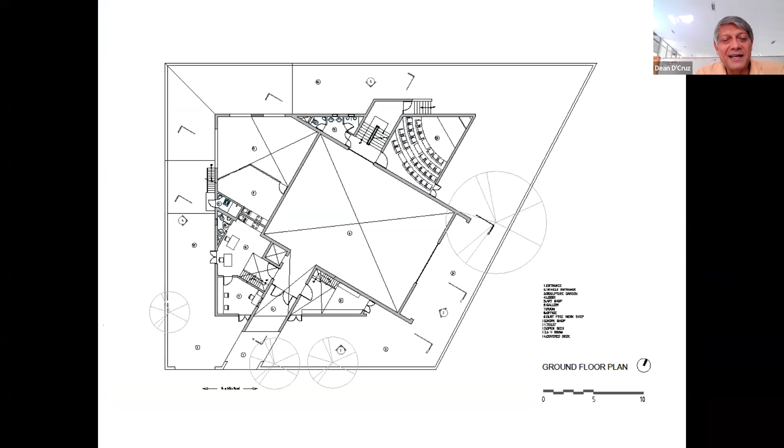The first thing when offering a solution in architecture is to really think out of the box. This is the box we designed—it's actually a museum, called Museum of Goa, which houses contemporary artworks. It's in an industrial estate, a high footprint squarish plot, and we decided to break the box and create something interesting in a fairly standard industrial layout.

One enters the building askew, moving into the various spaces from right on top, skylit, and carved inside the box, creating double height spaces linking all these spaces together and connecting them visually—essential in a gallery, where you can read the way you move through the space and also short circuit it however you want.

A lot of our work is drawn from the past, from tradition, but adds a contemporary twist. This is the cathedral we designed in Karwar, just south of Goa. A cathedral, as you know, is a mother church, so it's an enormous building that can accommodate up to 1,000 people.

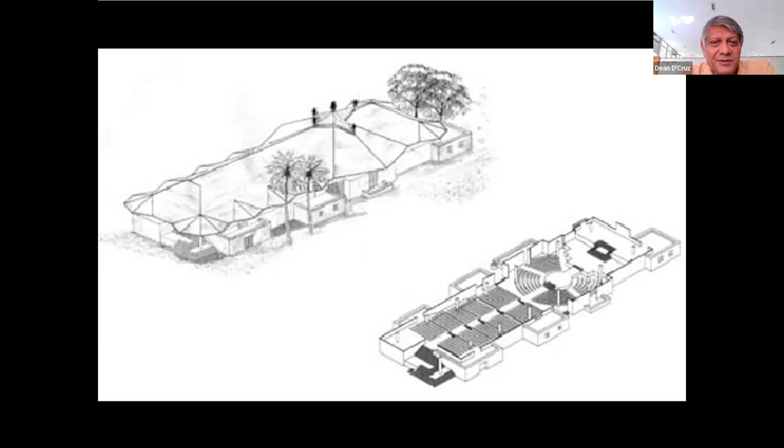It's in an area where Mangalore tiles, clay tiles, are used as roofing systems, and there's granite stone used traditionally—in fact Karwar is an export zone for granite stone. The building is very unlike a traditional cathedral, yet it draws its essence from tradition in a very contemporary manner.

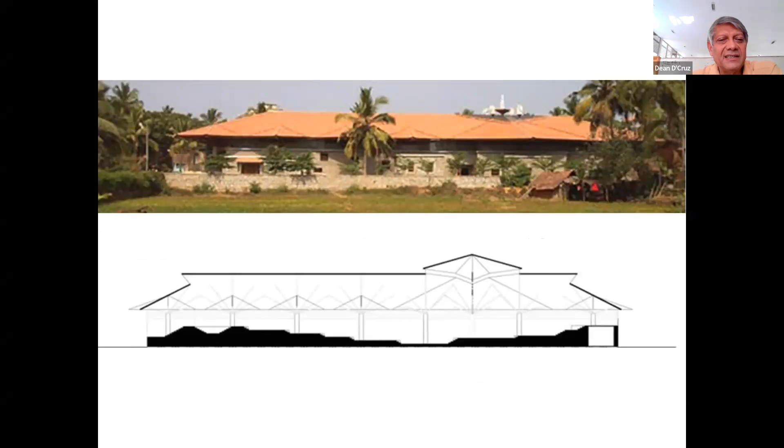It's actually a very linear building, like a giant amphitheater. It has a roofing system that floats above the whole building, resting on internal columns, not on the edge walls—very much like a tree, almost protecting the followers who visit the church.

A lot of it is in granite, with skylit areas all around and in the center as well to highlight the altar. That's the structural system we have.

We've designed about 300 houses across Goa and India, and everywhere we design, we ask: what is the spirit of the space? This one is right on the waterfront—we said let's make it feel like a ship's deck, so the house sits on the waterfront and opens out to the sea, very much like the side of a ship.

This building is set into an old stone quarry, and we followed that—the sloping roof gently rises from south to north, following the old quarry line, stepping up in the space. The whole roof is designed to have solar panels, making it completely solar ready. It's so important today, when looking at alternative energies, that we keep our buildings ready for them—a south-facing roof is the most efficient way.

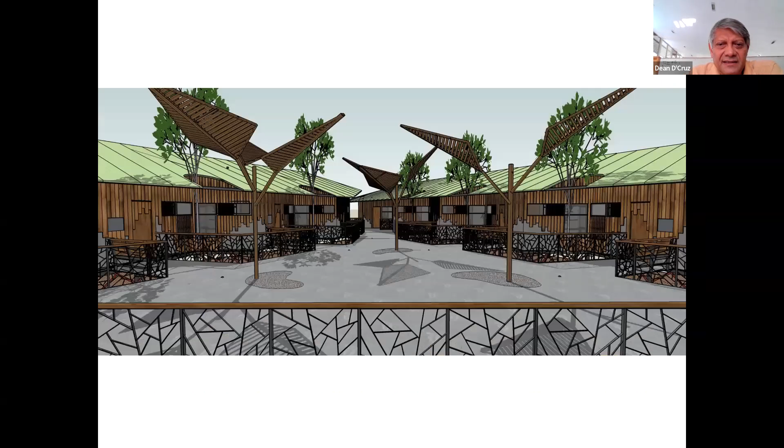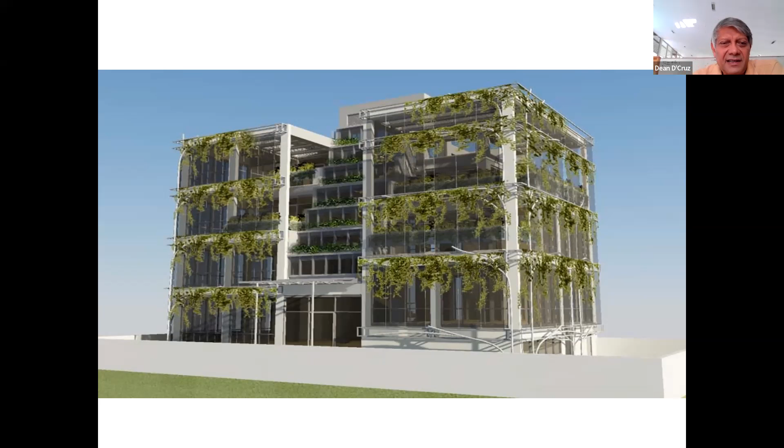It's steel, of course—it's a completely prefab building. It's a hollow column, hollow beam system, but all the services actually run through the core of the building. So even your air conditioning, your plumbing, your power lines, communication lines run through it. The whole idea is that it's a building which doesn't have services mounted on it, but integrated into it. And it's completely dismantleable, built in steel, so with steel prices going up, you can probably sell it for more than it cost you to build it when you want to demolish it.

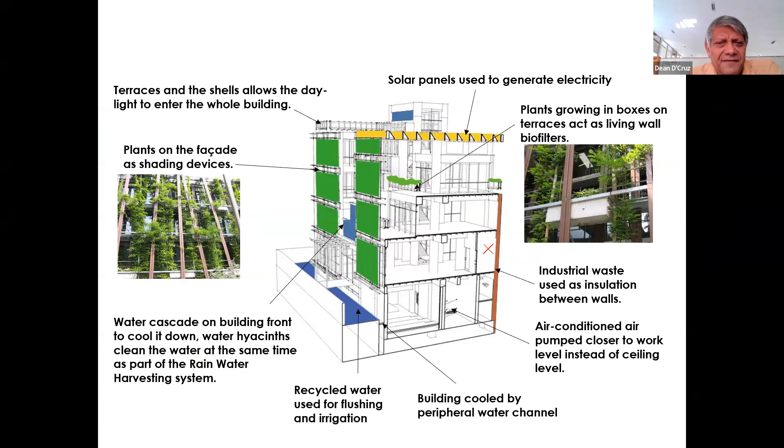The floors, of course, are just stone slabs sitting on neoprene pads. And those are all the little features that we've added to it.

This is a school in Bijapur. It's not yet built, but again, Bijapur is a hot and dry climate. We decided that we create these wind towers, actually capture air at a high level, and hydrate it.

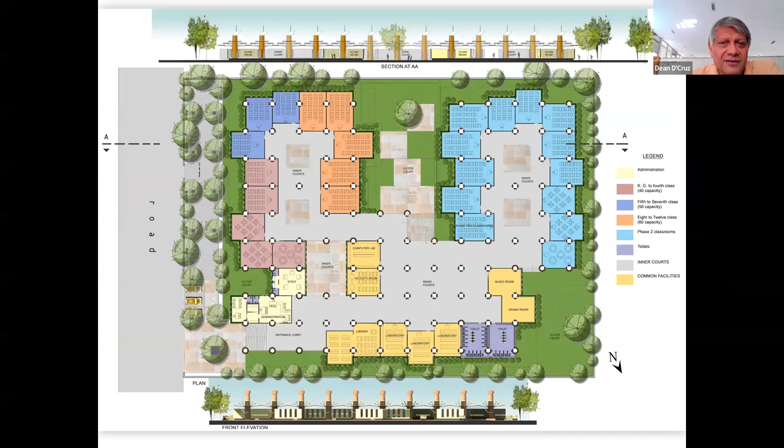The layout is just like a series of columns, and all the walling systems are actually flexible, so you can change the layouts of the classrooms and laboratories. That's the main concept of the cooling system, which takes in air at a high level, hydrates it, brings it down, and cools the space.

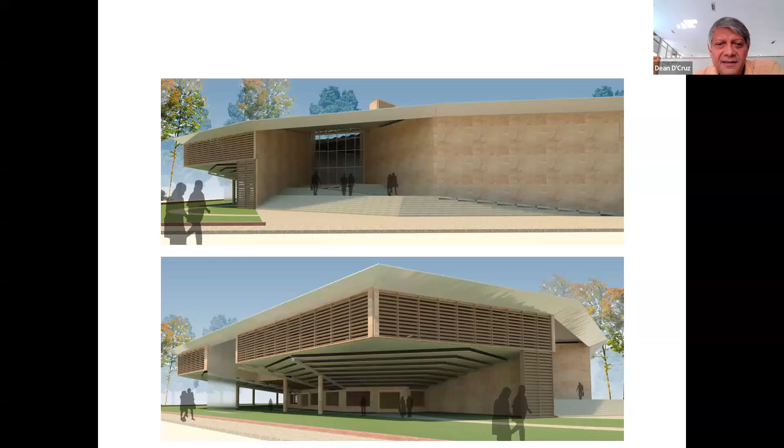For the same group, this is the library building. We have a cafe below, and the auditorium and classrooms above, and that's how the auditorium and classrooms are lit and ventilated with top lighting and bottom ventilation systems. That's how it moves through the space.

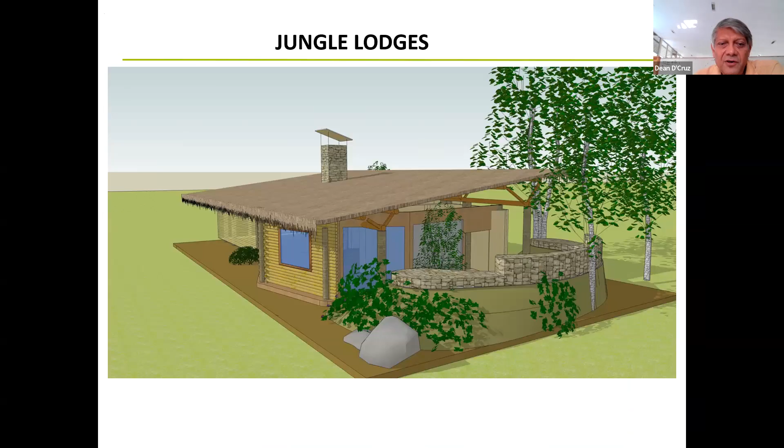In the lodges also, it's all about a response to where you are. So in the lodges, for example, a lot of them are built in areas which get very hot and very cold. Therefore, during winters, we have to have a natural warming system, using thermal blankets over water bodies and absorbing thermal mass.

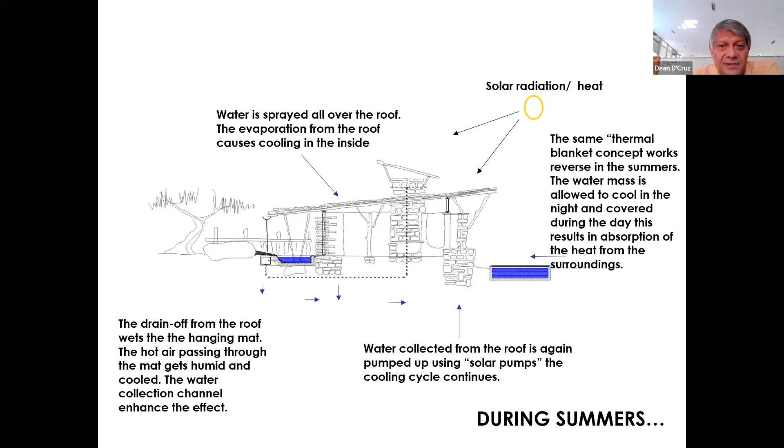And in summers, of course, how do you cool the building? So all these are responsible ways of actually responding to varying climates. This is another lodge in Bhuj, where again we're looking at how to integrate technologies into the lodge in terms of alternative energy systems, natural cooling systems, and appropriate materials.

The only way we can do this—and it's very difficult these days—is actually convincing a client to go green, because a lot of them think it's much more expensive. And the only way to do it is to actually walk the talk yourself.

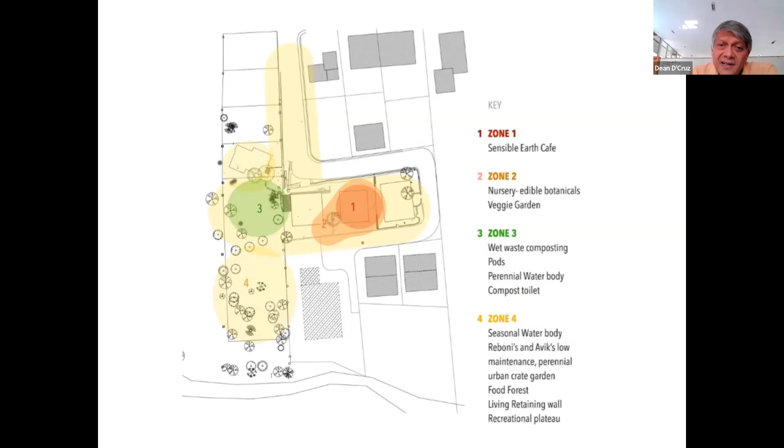So in our own complex of buildings, which has 3 buildings and a piece of land on the side, we decided to actually demonstrate it. Those are the 3 buildings: architecture on one side, product line on the other side, and our design center, where we have outreach programs on the issue of design and the environment.

So I'll leave it with that, and I'll let Sanjay continue, and leave a little time for all of us to have a question and answer session. And that's our buildings in the forest, at the edge of the forest. Thank you.

Thank you, Dean, sir, for presenting your unique projects and the concept behind them. I personally have visited the Museum of Goa by Mr. Subodh—really good design, sir, good design.

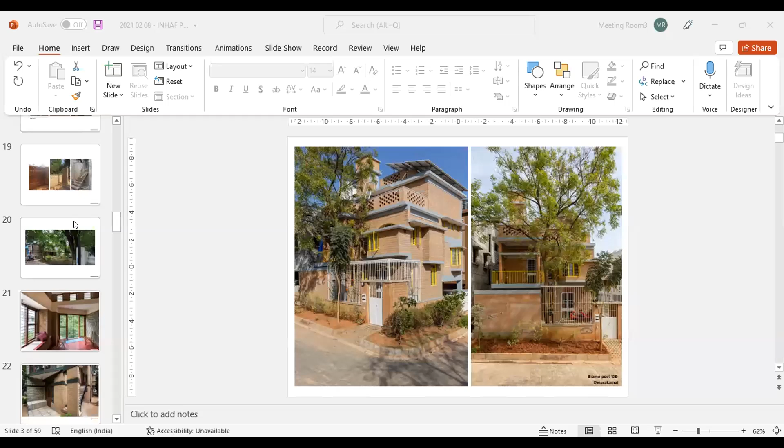Share here. Let it go. Yeah. So we have to slideshow.

So we at BIOME have been around for 30 years and we have practiced at different scales. One of the scales we have practiced a lot is the small house, for, I must say, the very interesting clientele of Bangalore who want to really make a house of their own, and if possible, it has to be ecological.

So we build with earth a lot, because the best earth available in India to build is in Bangalore. So why not use the city for the resource it can give? Most of the earth is usually sourced from the basement or the water tank, or if there is a larger project happening. So this is a house on a 30 feet by 40 feet plot.

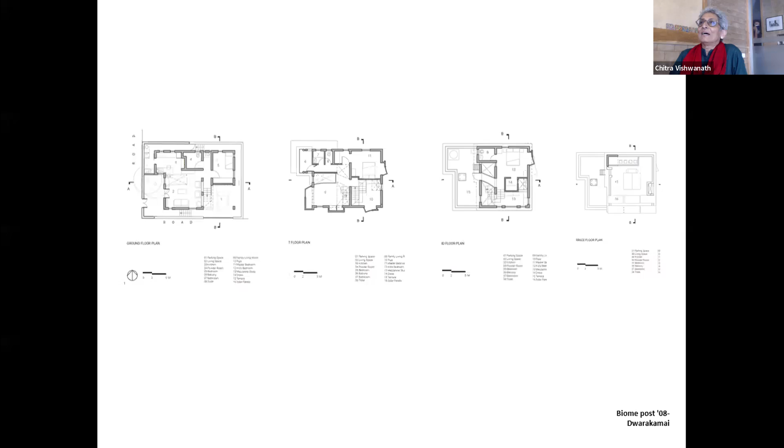And you can see that everything is there. You can see the large solar panels too. And it has retained the neem tree within its area. So that's the plan of it. And this is a section.

So you can see how one has to really modulate that everything comes within the space, but also have fun, and also make it aesthetically different from otherwise normal construction.

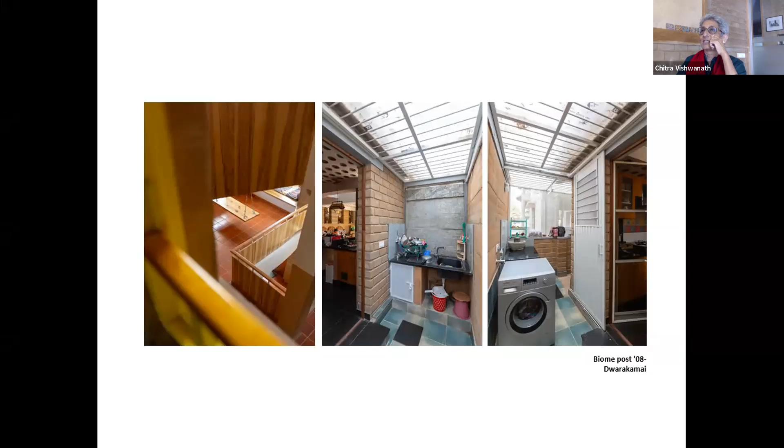But in the smallest of places, you have to get the best light and the best accommodation for everything needed in the house, from the washing machine to the dishwasher, and extra space outside to use in the kitchen. The space is inside, and that's the terrace.

So the terrace is one of our favorite elements in a house. I don't know how to stop this, but...

So the terrace is used for energy. In this case, the terrace is used for solar water heating, electricity, and also a small biogas unit. And there is the Gujarat boiler. All sorts of energies on the terrace.

We collect the good water, we call it lifeline water, for drinking and cooking purposes on the terrace, and we treat the wastewater on the terrace because that's the only place where you get the sun. The sun and terrace go synonymously, and you use it to the complete possibility.

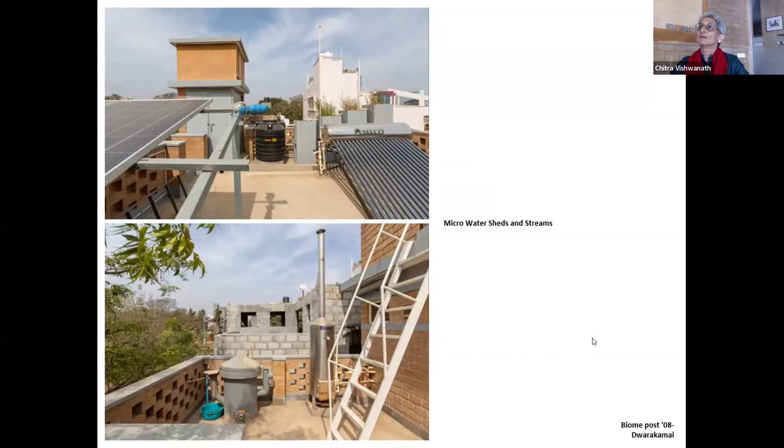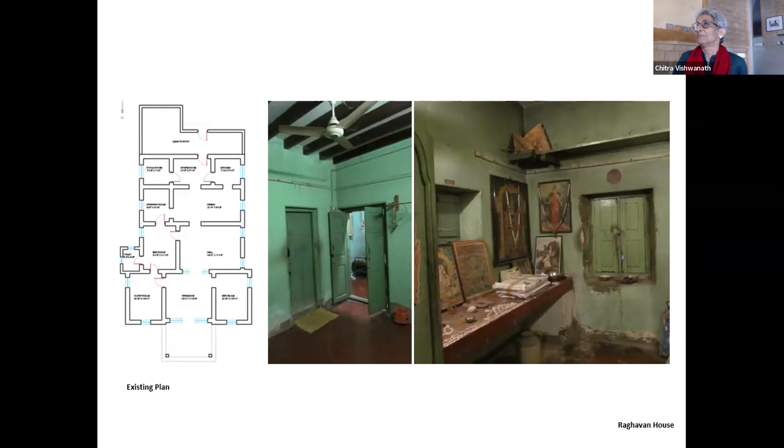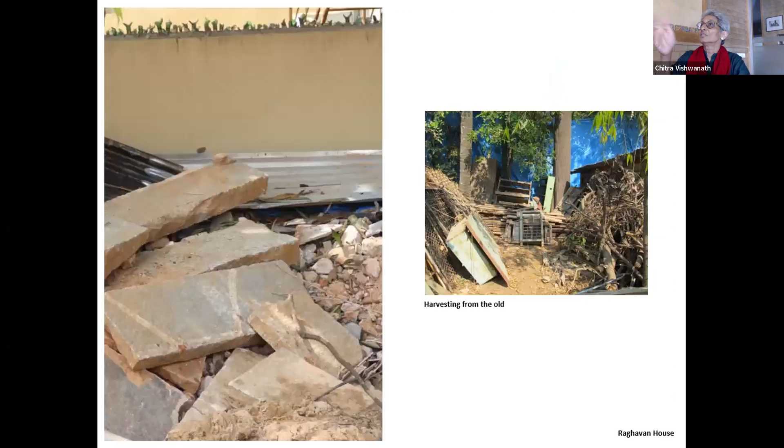So we kept all the materials we were able to get from the demolished building, kept them neatly. You can see bricks, complete bricks, and this kind of complete bricks one could get only because the mortar was mud. Broken plaster, broken concrete, the stones, the old windows.

But what really happened was that when we started digging for the foundation, we found that the soil was soft and there was water. We went back to history and found that this was also a lake bed some 100 years back. So it was filled up and turned into colonies, the way Bangalore does all the time.

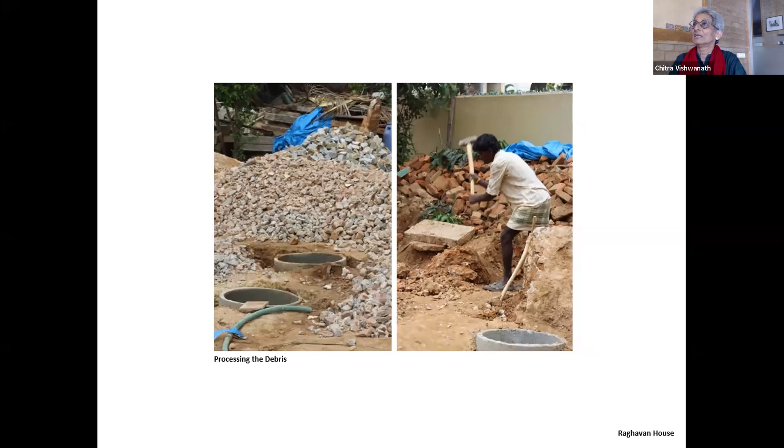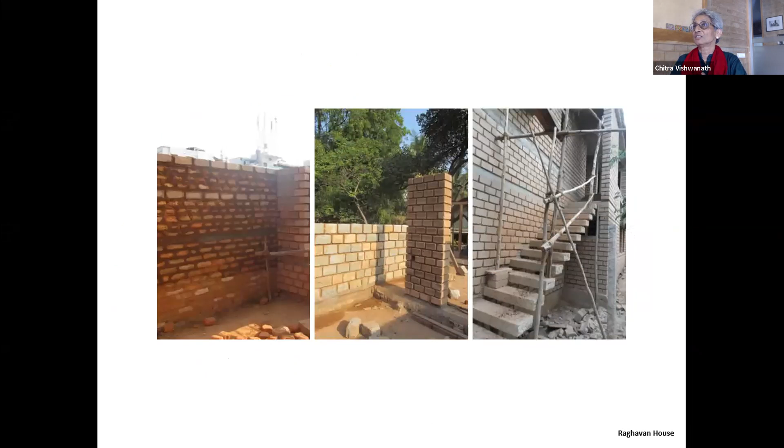So the stone which was earlier in the foundation becomes part of the house above, also saving cost. That's how the building is now. All the trees saved, inside is better lit and ventilated, and within the budget the client gave. And nothing went into the urban landfill.

So they wanted courtyards within, they get courtyards. Similarly, taking from what Dean spoke about, the steel and how you can get back the material.

This was a project for a small school in a 15,000 square foot plot, a 10,000 square foot school. We decided that we should make it in such a way that the building can be moved by its parts and repurposed or reused, rebuilt with the same material.

Luckily here, the land was available to the clients only for 5 years, so it was easy to convince them to use materials which can be reused completely. Even the foundation can be removed, because reaching up to the plinth we used what in Bangalore we get as stone slabs, so we can fill up for the interior.

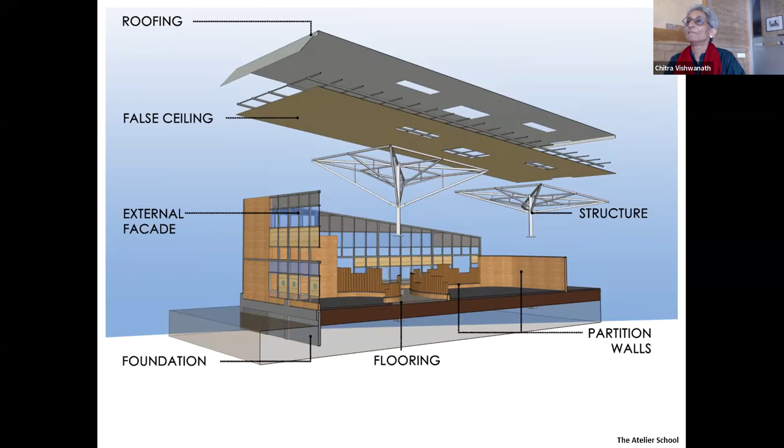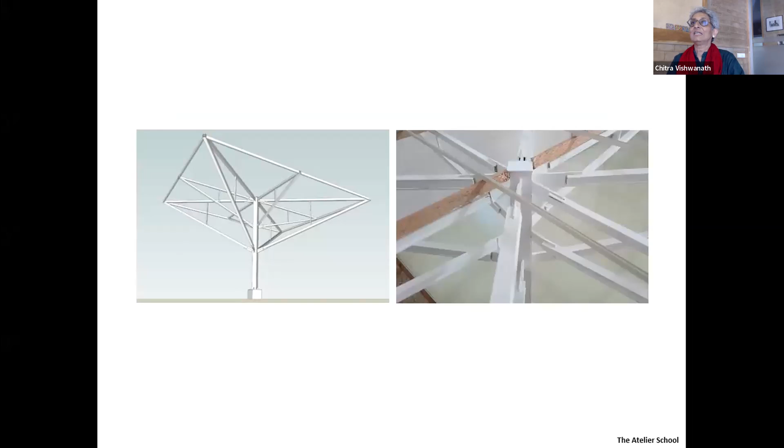The structural engineer brought two columns into one by the way he decided to span. This is the building, this is what is inside. The walls are made of paper tubes.

So if you don't remove them, they can just compost. Even the furniture for the children is made with paper so that it's much lighter. These curved walls reduce the reverberation because it's in fact largely a large shed.

The flooring is paver blocks, and the lower portion is filled with quarry dust, easily available in Bangalore. So not only do you get back the flooring, you also get back the quarry dust, which I'm sure has doubled its cost. This was about 5 years back. This is the interiors.

And this is my favorite part of the whole project, the small toilet. It's a toilet for the small occupants, and all the pipelines come to this center space, which can be opened if it gets clogged, and then they go out in a larger pipe. It's important that one also works with the services and has fun.

This center space now has a curtain, where the children, if they've soiled their dresses, the dress is changed, or they wait till a toilet is available for them. Then we made our own office on the first and second floor.

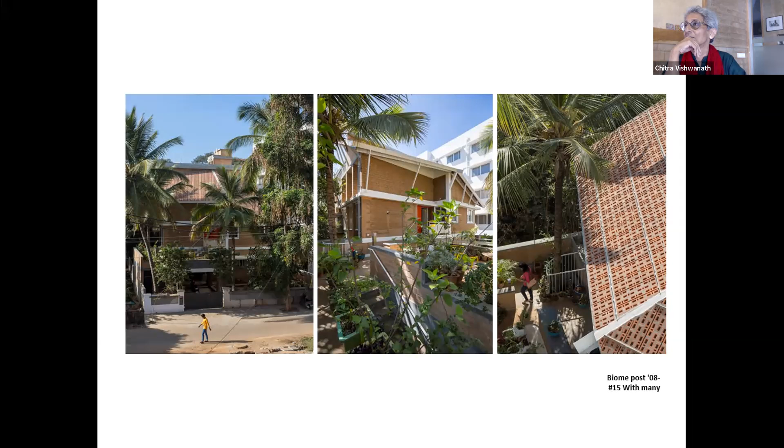Here we changed the way we put the roof. It's a GI sheet, but the top of the roof is with jali blocks, which allows water to pass through but shades the roof so it doesn't become hot inside.

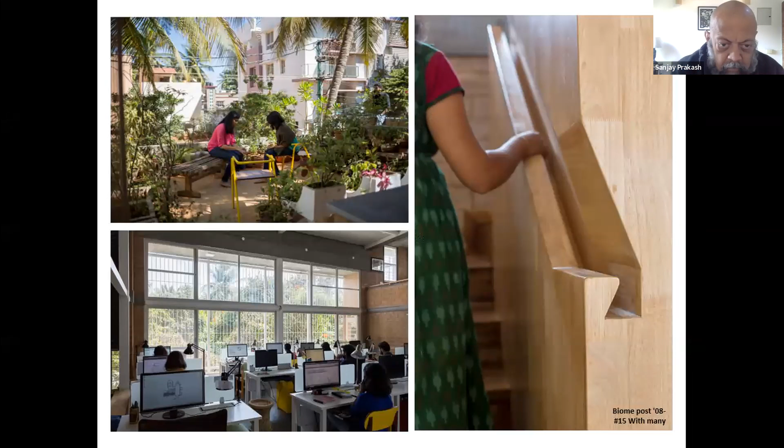That's our office. The terrace is used for discussions. The inside opens to the east with a huge amount of shading, so it's just the light needed internally.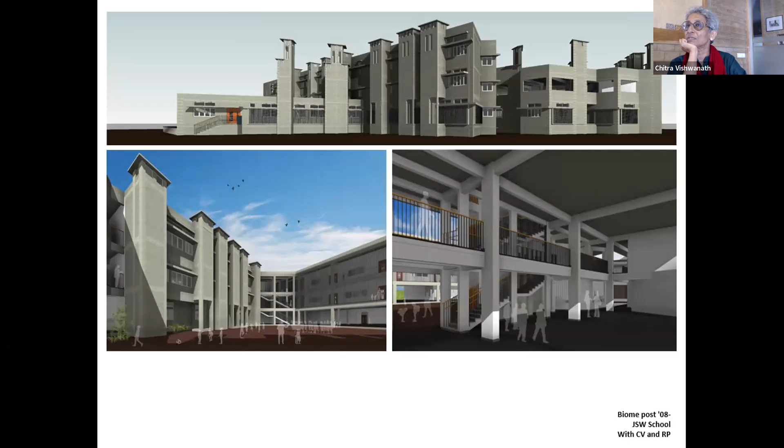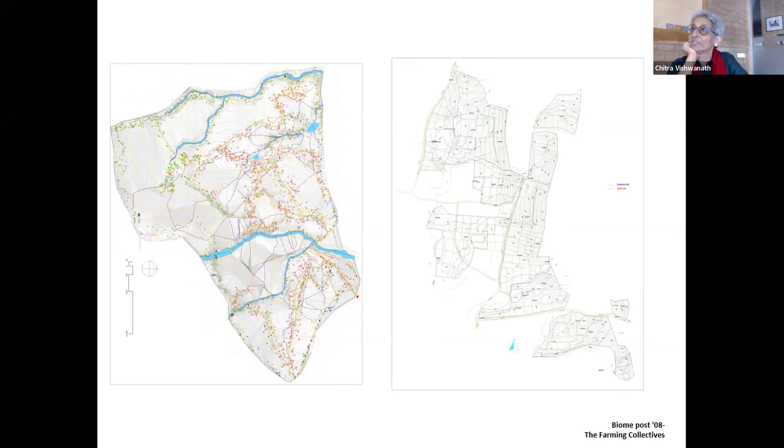Right now we are mostly busy with designing collectives. Collectives are where a developer picks up a larger piece of land and people come together and ask that the space be designed for themselves to live, but also design the whole area for energy, water, and food. So nobody owns a place, but they live collectively, and the land is decided where the construction would be happening, decided upon the kind of soil available, the soil which cannot be used for agriculture.

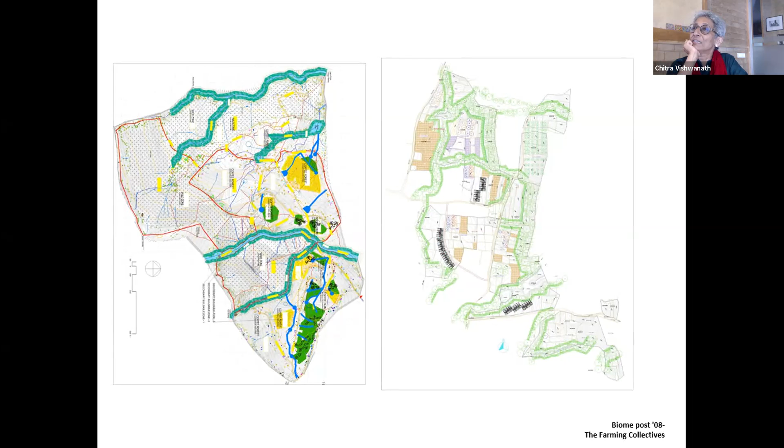So the whole land is studied, the waterways of the land are studied. We make riparian zones where no more construction would happen, and then decide where you will put the buildings. The buildings come last. Similarly in other projects, this is how the buildings come, and they become a community space rather than plotted development.

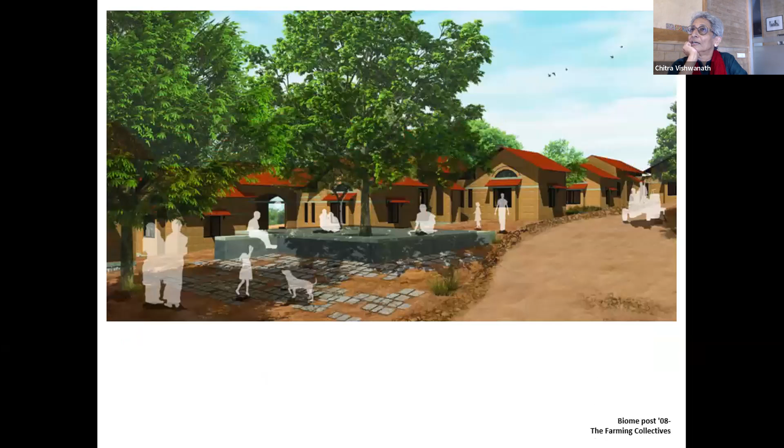And we do a lot of small homes, sometimes as small as something on a terrace. This is a 30 by 40 plot, and you do a really small addition of a bedroom and a kitchen. What gives us the most joy is how the people use the place and feel happy about it.

Here is the lady of the house doing her yoga in front of the space we've designed under the light. And that's the best award one could get. Thank you.

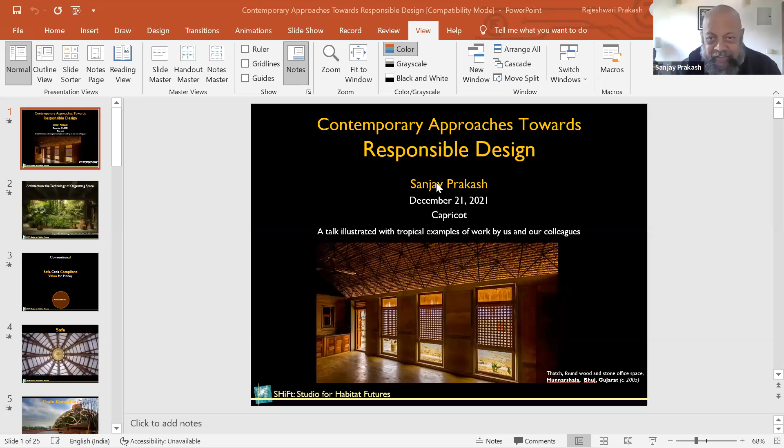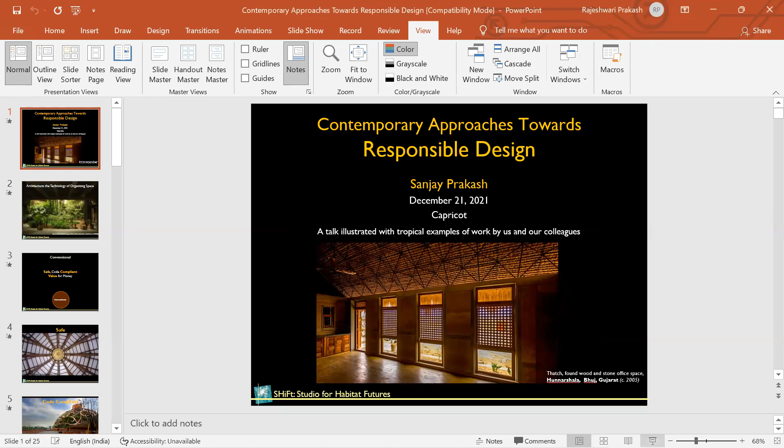Okay, there you are. So I've put together the presentation slightly differently, in the sense that I haven't gone project wise, I have gone concept wise. Here is a talk illustrated with tropical examples of work by us as well as our colleagues. This particular one is from Sandeep Virmani of Bhuj, who has put together this wonderful office made of found wood and recycled thatch.

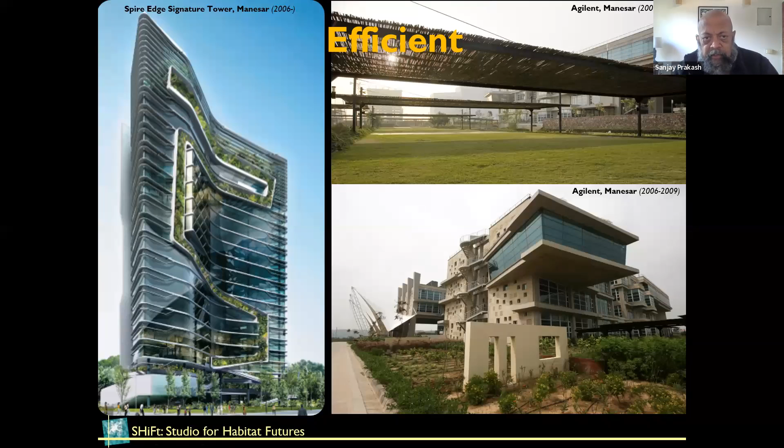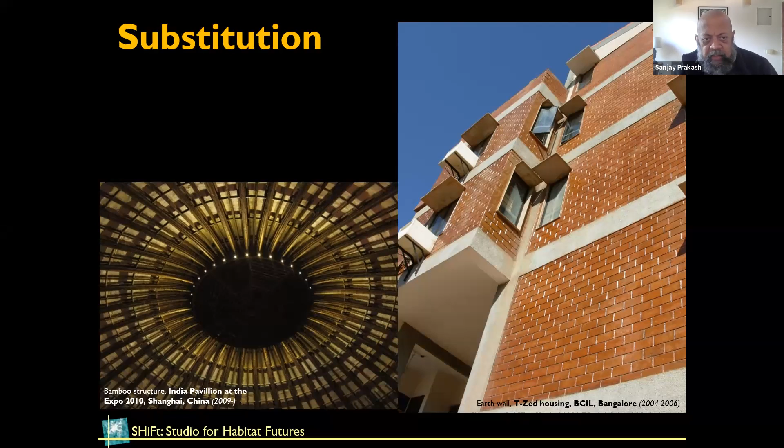Substitution here is more usual. Steel is substituted for bamboo on the left. Fired brick is substituted for interlocking mud blocks on the right in a place called T-Zed. And here are 3 more examples of substitution, where we have a variety of earth and stone materials found by digging pokhri in this place, which was used to make the stone floors and the stone masonry. The timber, of course, came from the trees that existed on site.

This is a 65-acre farm, the Mueller Eco Farm in Pokhara, Nepal. I was particularly scared because it was on the epicenter of the earthquake that happened a few years ago, and for a while I lost contact with the owners. But after a week or so, they wrote to me saying that no, this house withstood the test of time, and we slept through the earthquake, and now we know for sure that it is 100%, 110% fine.

This was a famous little building we did at the Rajpath Janpath crossing in Delhi, called the Mati Ghar, in Indira Gandhi National Center for Arts, which used stabilized earth blocks. While on the right, you see a building we did in local stone, with a little bit of concrete in some of the beams. So we used local stone to make this eco farmhouse in Pataudi, where adobe has been used for the infill walls.

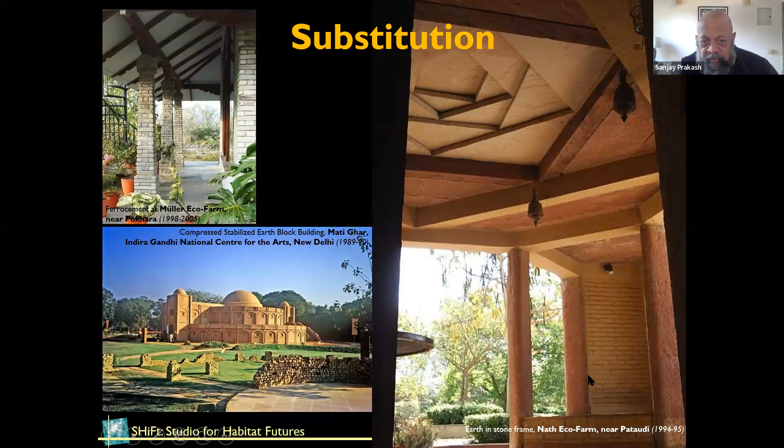So this is the green world as it happened, but there are 4 more things that I believe we are missing out on when we talk about responsibility. This is what I feel the youngsters amongst us will be living to see, which is equity, sufficiency, resilience, and identity. Let's take them one by one.

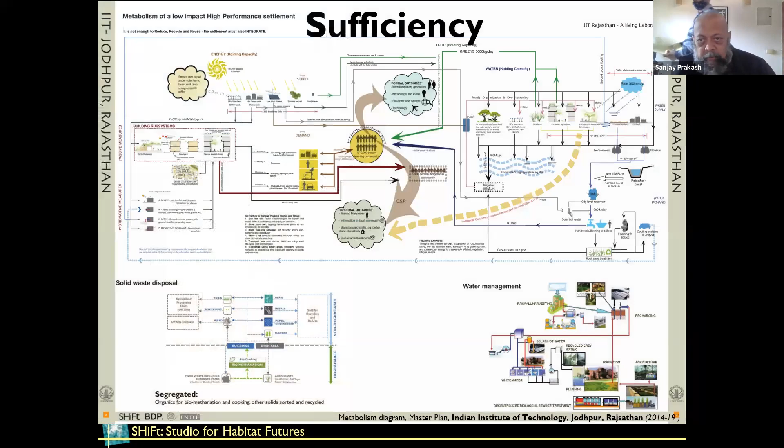Sufficiency is also demonstrated in the way we compute for recycling of resources in this, which was the IIT Jodhpur project, where we did the master planning. While resilience is demonstrated...

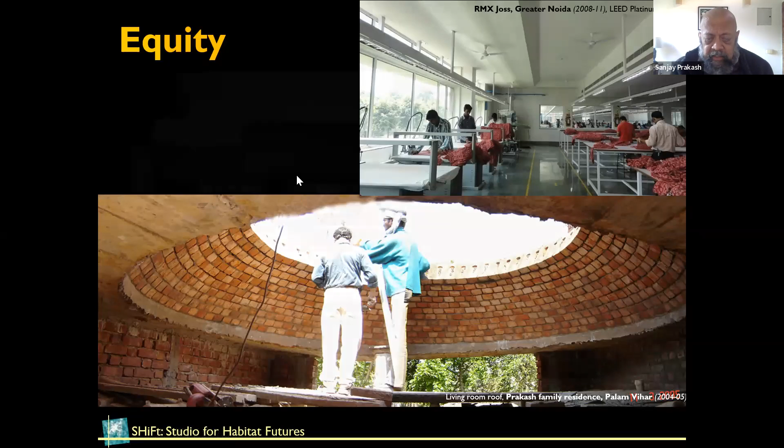As architects, we don't realize that we control a lot of the economy of the nation. Clearly, if these people can earn a better living out of the skills they learn from a building, it is so much better than de-skilling them, which is what modern industrial construction tends to do.